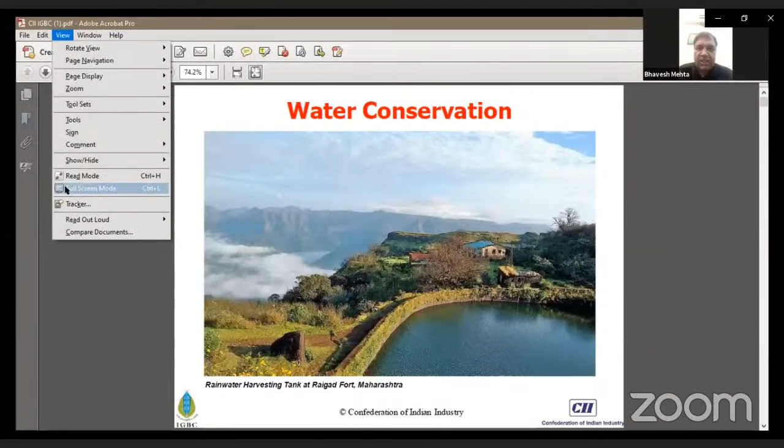Let me say the topic of today is environment protection and environment conservation. First, let me talk about Indian Green Building Congress and CII. CII IGBC is a non-profit organization where we promote the concept of green and sustainability, and we all work voluntarily. I am part of the core committee of the CII IGBC Mumbai chapter. We also have a chapter in Vadodara, but we'll talk about that later. The activity of CII IGBC is to certify buildings as green and sustainable.

The ultimate idea is to provide healthy living to the end users. I use the word 'end user' because a lot of developers nowadays have started constructing green buildings under certification from CII IGBC. The different types of certification are normal certification, silver rating, gold rating, platinum rating, and now we are coming up with the net zero building. The concept of net zero building has also come up, and our own CII IGBC headquarters at Hyderabad is the first net zero building, where on the contrary, it gives energy back to the grid. It produces energy using solar panels and gives the energy back to the government of Andhra Pradesh or Telangana.

I am given 25 minutes, and I am sure I'll be able to finish my session in the given time. So I will start my presentation.

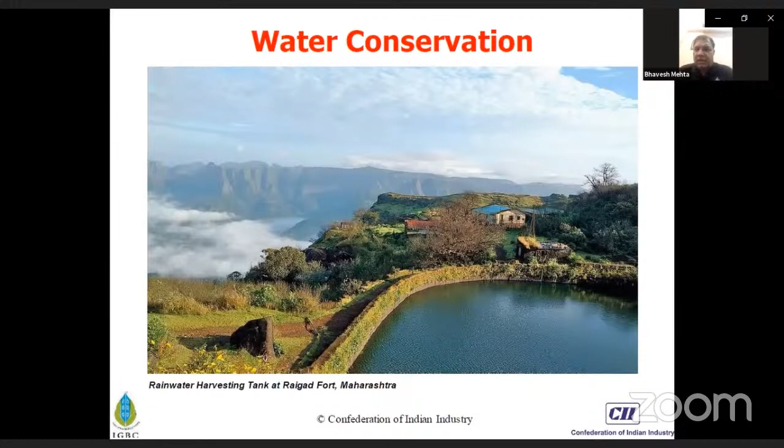Samir bhai has given a fantastic presentation on membrane technology - primary, secondary, tertiary. It is the latest technology, tertiary membrane, which is implemented by many corporates, and nowadays it is a must. Can you shift to the next slide?

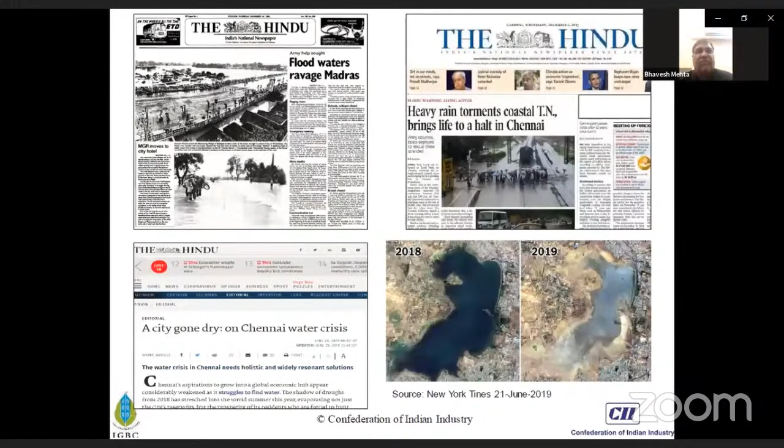If you read in the newspapers, like what Madam says, Baroda some years back was a flooded city, submerged in water. This is the situation that will happen if we don't understand and take care of situations which are not under our control. Heavy rains have torn through coastal Tamil Nadu and other places. These are the calamities we have to address.

So I'm going to talk about the world's water. 70% of the earth is covered with water, as you all are aware.

Now, where is the fresh water? Of the world's water, 97.5% is salty ocean water, which you cannot drink. The fresh water is only 2.5%. If you look at the statistics of the entire water system across the globe, 69% of the world's fresh water is glaciers, leaving only surface water. Only 0.4% can be potable water, or usable, because some of the water, like glaciers, cannot be used. Glaciers are already melting because the earth's temperature is rising. So today we have only 0.4% of the total earth's water which is usable.

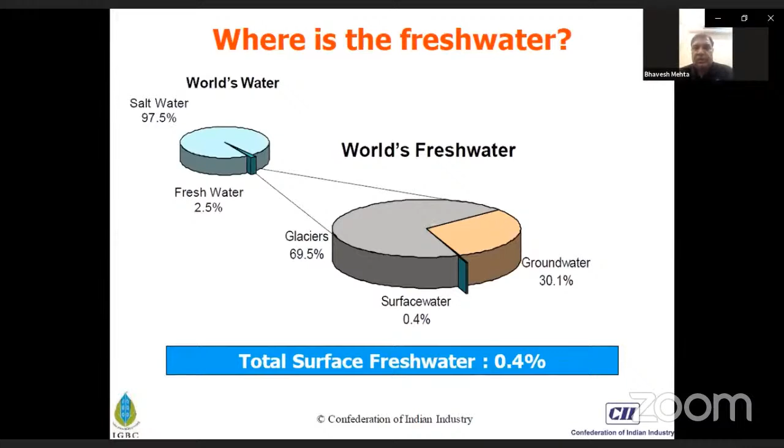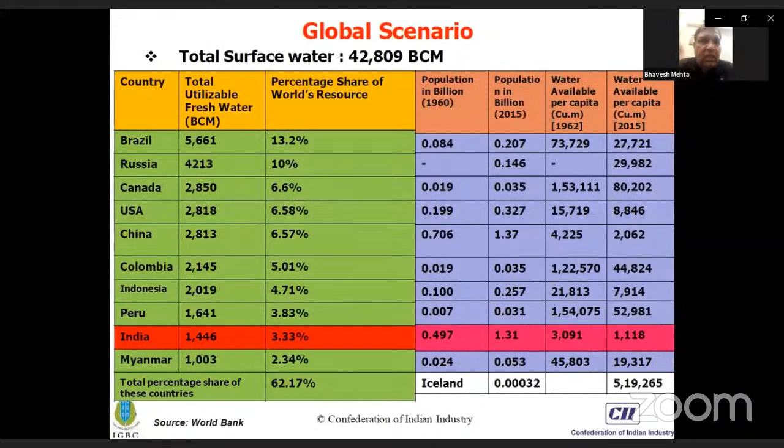So what is the national statistic about water, since we are in India? 17.5% of the world's population is in India, with only 3.3% of water resources. We have 12 major rivers in India, 4,000 BCM of water available, and 1123 BCM utilization.

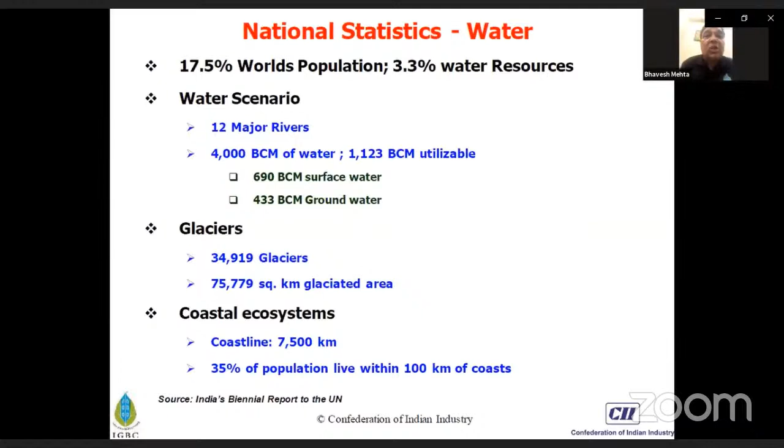We also have glaciers, with the number of glaciers and glaciated area given here. India is lucky enough to have coastal surface and coastal ecosystems, with many states connected to the coastal area. 35% of the population lives within 100 kilometers of the coast.

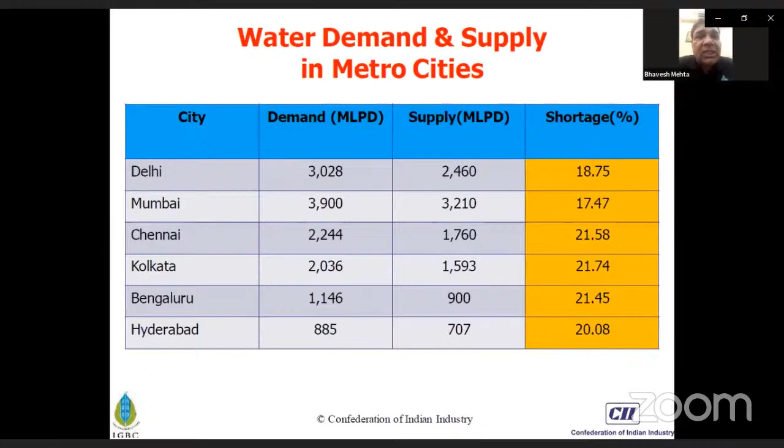So you see the shortage of water. Maximum shortage is found in Calcutta, minimum shortage in Mumbai. This statistic is from the Meteorological Department, and CII and IGBC made this calculation earlier.

Now we'll talk about water demand and supply again. Overall demand is expected to exceed supply because population is rising in India. Many rivers are being converted into dams and barrages, like in Ahmedabad where the Sabarmati River has a riverfront, which reduces the width of the river and restricts it. There are many places where rivers are a major concern, like the Mithi River in Mumbai.

Many of you must have visited Mumbai regularly. The Mithi River is one of the most polluted rivers, because of the lots of activities happening at the banks of the river in Kurla, Bandra, and other parts of the river. So the water demand and supply is already mentioned here. Can you go to the next slide?

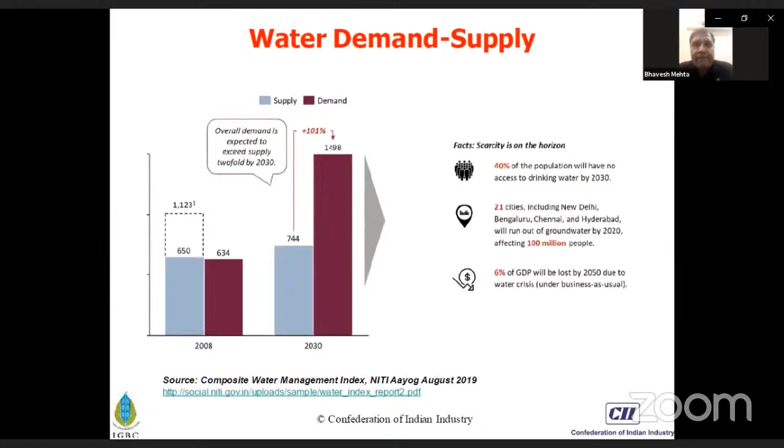You must be aware about the National Building Code. Now I'm coming to something a little technical. As per the National Building Code 2016 (NBC), the requirement of water is already mentioned in the building code, and every developer, every builder has to make a makeup water tank or a service tank in line with the quantity of water required per person.

And if you are a complex, you definitely require water for horticulture, gardening, and air conditioning. If you have a water-cooled air conditioning system, you require makeup water for the cooling tower. There are certain norms given by the Ministry of Environment and Forest, under which NBC 2016 is mandatory and has to be followed by every builder or developer beyond a certain carpet area or plot area, as part of the National Building Code.

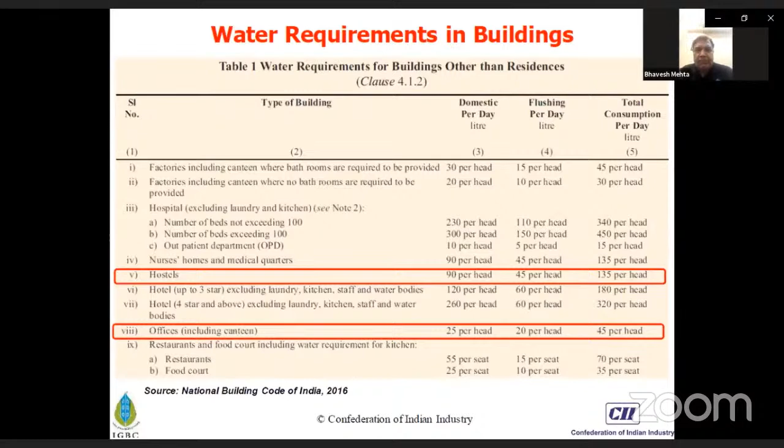Now we should have a 3R approach. One is recharge - there is rainwater harvesting, a good initiative by the Collector of Vadodara, and she said it's phenomenal work that has been done by her.

You reduce the water. Nowadays the water consumed in a washroom, in toilets, in the kitchen - these are the three main areas where we consume water. Now it is mandatory.

Now there are aerators. I have a demo of an aerator, but for some reason I could not play the video. Ultimately, as per the norms, as per the ministry, as per the NBC, low water fixtures are also available now. Even when you apply for green building certification, you should have low water fixtures.

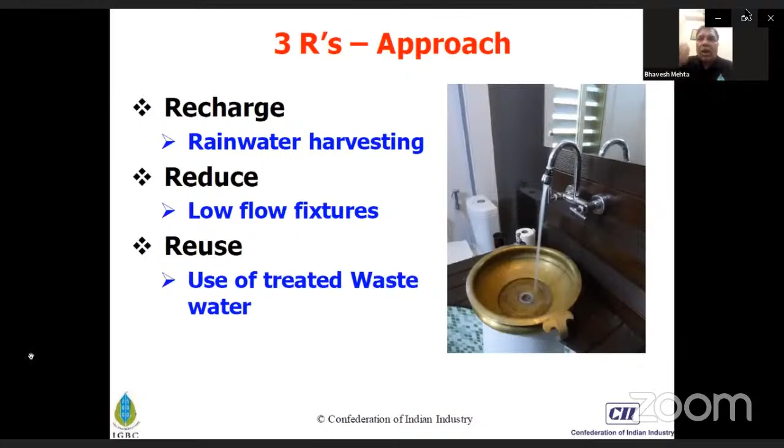But the ultimate idea is 3R. Everyone has to implement the concept of recharging.

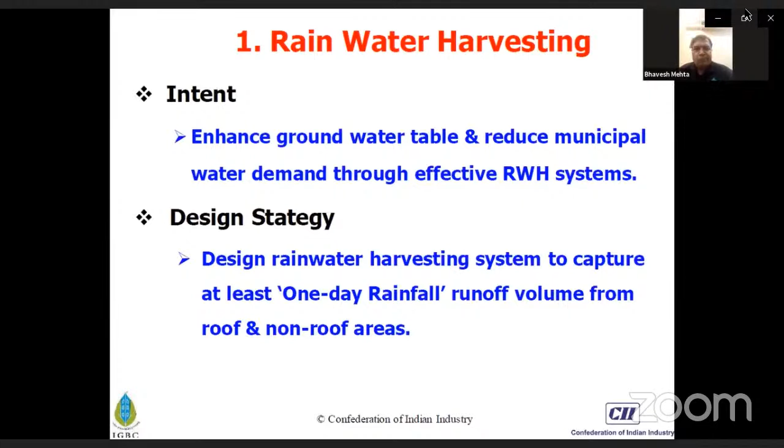Can you go to the next slide? Yeah, so what is the criteria to arrive at one-day rainfall as per IGBC? IGBC is Indian Green Building Council, an autonomous body of Government of India which is directly connected to PMO. So when we talk about average rainfall, every place in Gujarat, every place in India has different rainfall. There are different rainfall amounts in different cities of the country.

So you have to see what is the rainfall of your city, your area. Accordingly, you have to work out the average peak monthly rainfall, and then decide the total to design the rainwater harvesting system. The higher the rainfall, the more your one-day rainfall calculation will come out overall. So higher the rainfall, lower the harvesting volume needed, because when rainfall is more, we need to harvest less. When rainfall is less in the area, you need to have more rainwater harvesting so that you can use that water 12 months in a year.

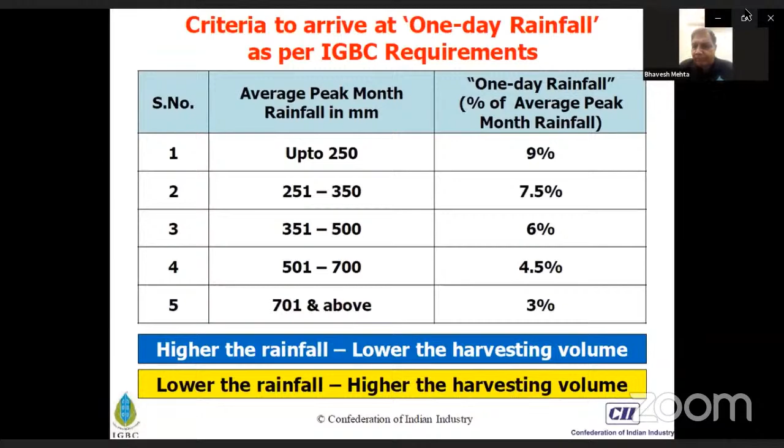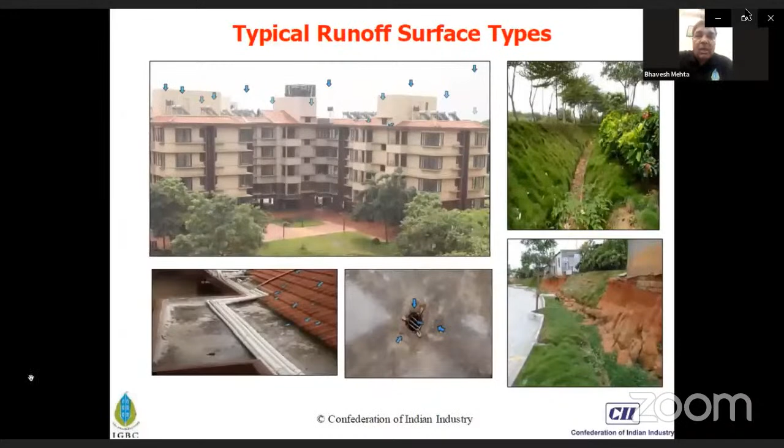Next slide. Yeah, so now you're going to see the typical runoff surface. Runoff surface means when rainwater falls on the terrace, on a chajja, or into a drain. These are the typical runoff surfaces - places where rainwater falls and ultimately it carries over to the last location. Like if water falls on the terrace, it slowly flows down into the gutter and may go to some drain, some nala, and ultimately often ends up in the river. In a case like Mumbai, the water goes into the sea. Whatever rainfall happens in Mumbai, a major amount of that water goes to the Arabian Sea, right beside it. So this is what it is.

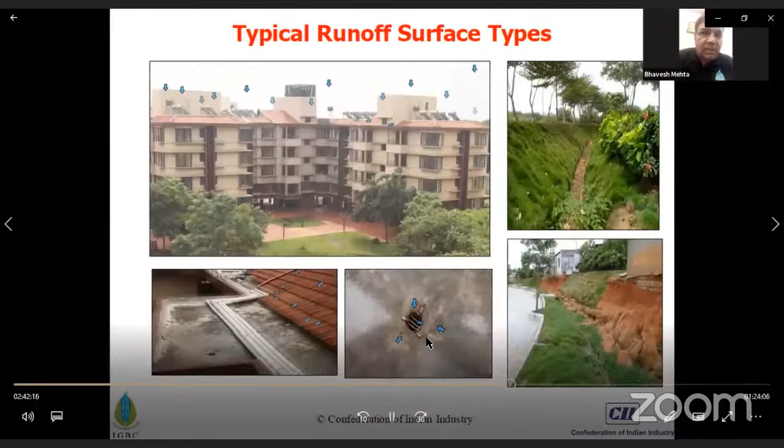This is a clear calculation which we as Indian Green Building Council always promote, because this is also part of the credits. When you do rainwater harvesting with certain calculations validated by IGBC officials, you get certain credits. Whether your building is applying for platinum rating, silver rating, or gold rating, there are certain credits needed. This is one of the credits you can earn through activities in your premises with proper calculation.

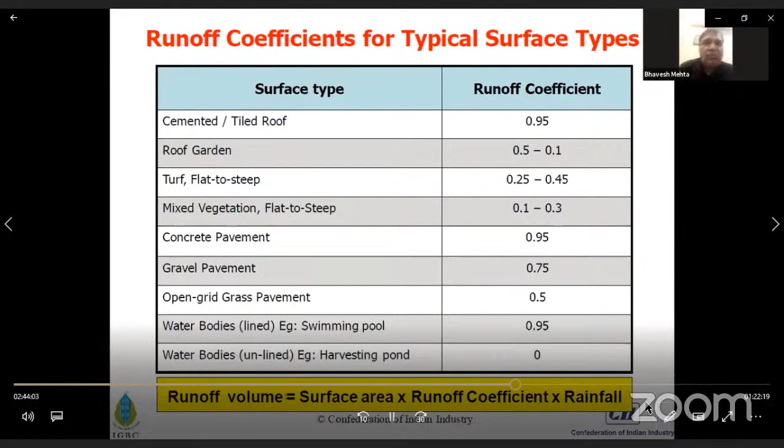Next. So what is next? Yeah, so what are the rainwater harvesting strategies? You have to collect the rainwater. There will be a collection pond around the house, as we just talked about, it will collect into a certain pond, or you have a storage tank.

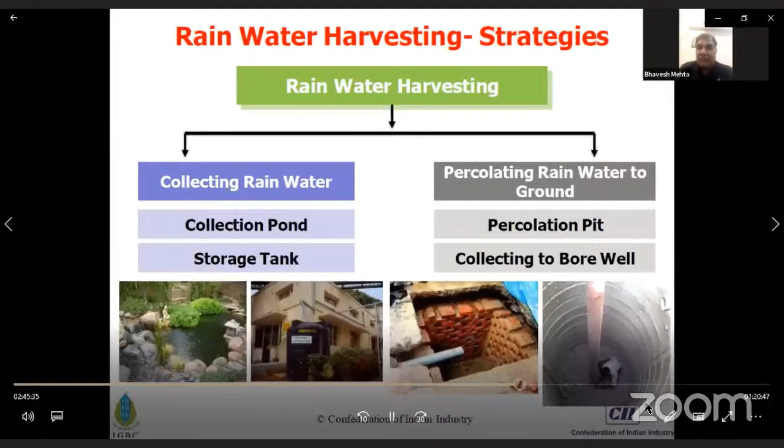What they are doing is, even on the street road and colony road, they have created a canal connected with the drain. So in the entire ONGC premises in Dehradun, whatever rainwater is there gets collected via this canal to one of the rainwater harvesting pits. This big pit is there in that particular ONGC complex in Dehradun. So this is also one of the ways.

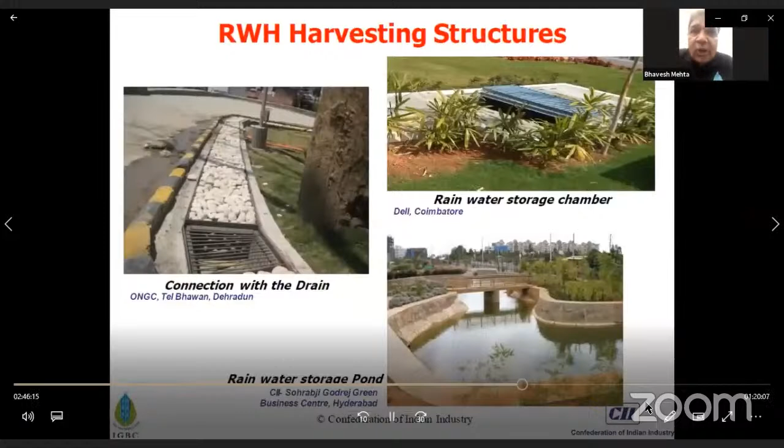In Dell Coimbatore, they have a storage chamber. So this is the way they have done it there.

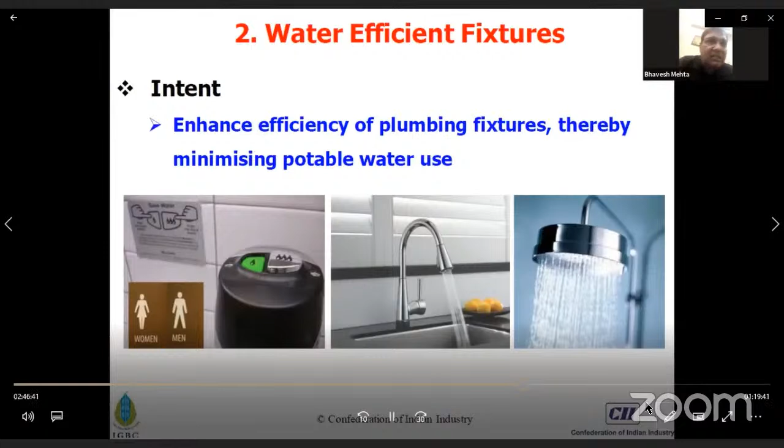Now, if you see the next slide, we enhance the efficiency of plumbing fixtures. You can control the amount of water by providing an aerator to your shower, your tap, and even in a washroom, as I said earlier, you have dual fixtures or 2-level fixtures. Next slide.

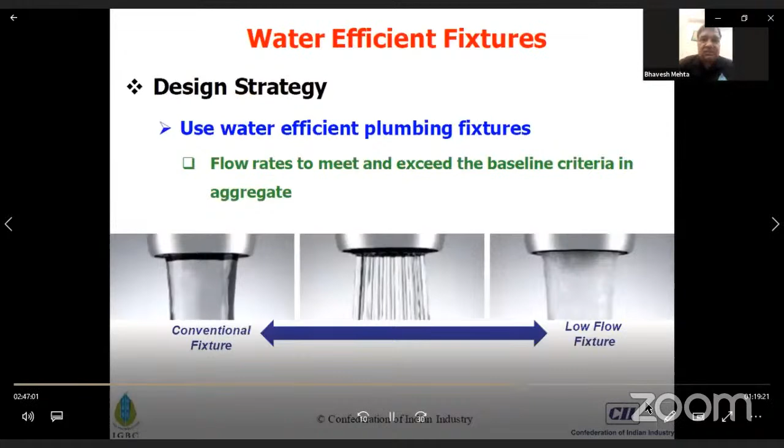Okay, next. So what are the water efficient fixtures? This was the baseline as per the National Building Code.

How much water is used in a single flush versus a dual flush - they have given all this data in the National Building Code and in the Uniform Plumbing Code UPC 2008.

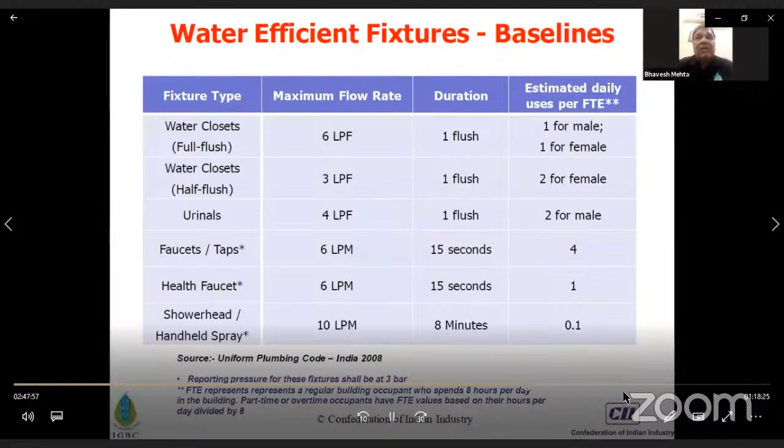So these are the norms given by the Government of India, which every developer, every builder, and every owner has to follow strictly. Next.

So, water efficient fixtures - as I talked about, low aerators, and then dual flush systems, like in a toilet.

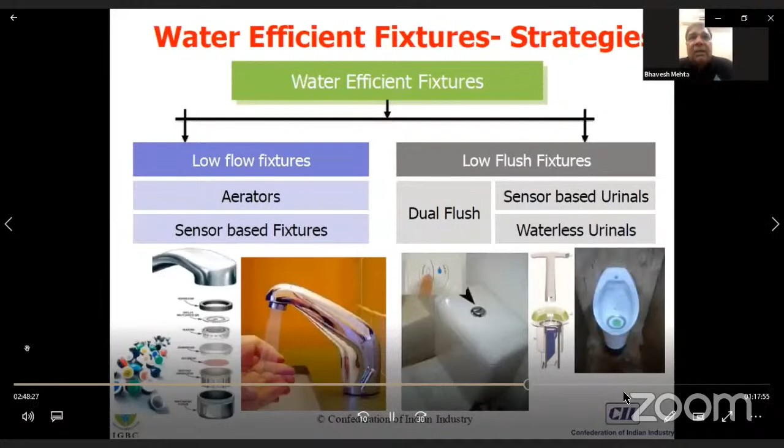Here there is an aerator demo, but it cannot be shown because the video is not connected. Okay, go to next slide.

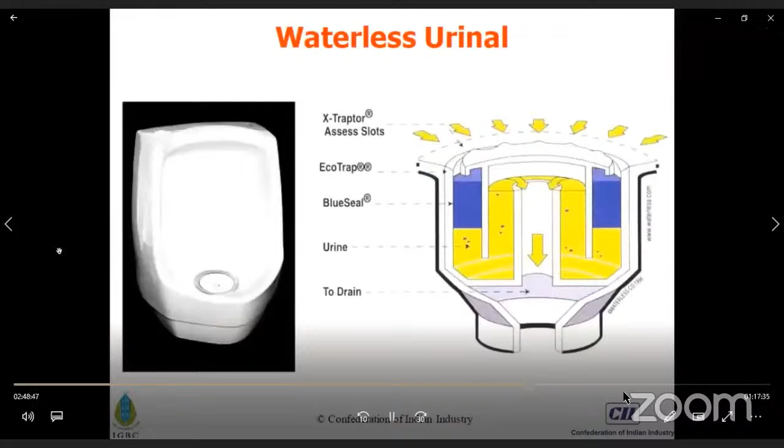So in a lot of cinemas, malls and other places, you must have seen waterless urinals. This technology has come up - already popular in developed countries, but in a developing country like India, it has also been implemented in a lot of places. This is also one way to conserve water and reduce its use, where you don't need any water for the urinals.

If you see the cross section of these waterless urinals, it shows how the system works and how it will not create any odor, which is always a concern with urinals. Using this eco trap concept, it's a standard urinal made by a lot of reputed companies, already implemented in many societies, cinemas, and malls. Next.

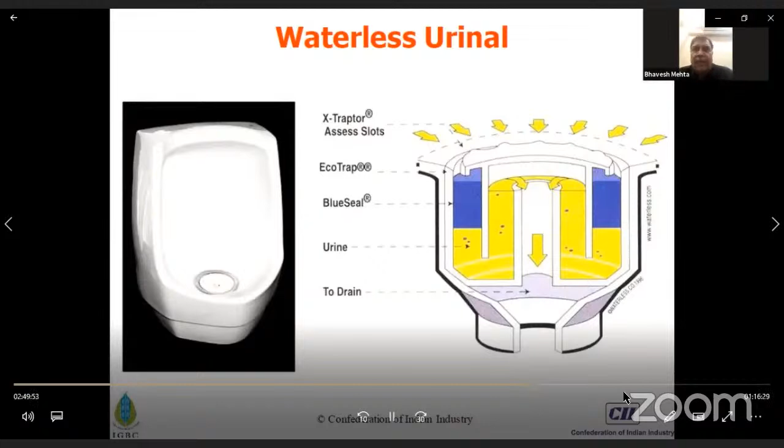Yeah, this is also the same waterless urinals. This is the internal technology, internal arrangement of the waterless urinals, ultimately to avoid the odor.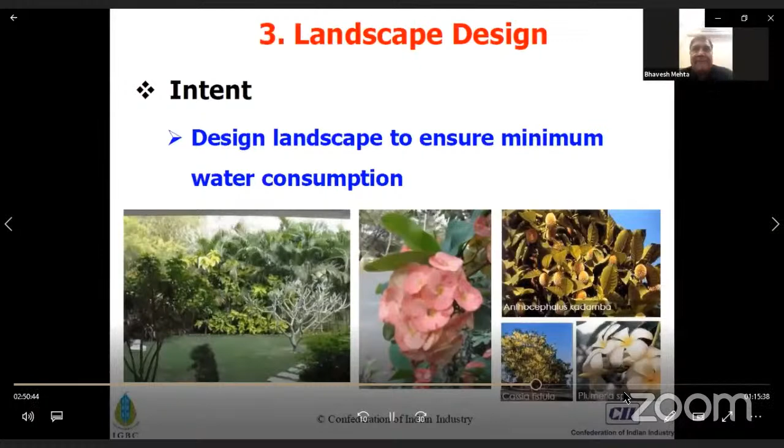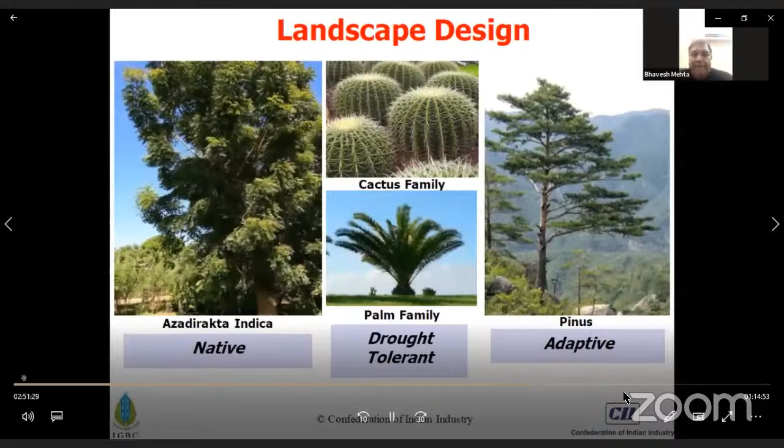How do you manage the irrigation system? Again, this is about water conservation. Suppose you have a big garden or lawn - how do you conserve water? We are all aware of irrigation systems that reduce water demand through water efficient management systems, like central control.

You can provide soil moisture sensors. Nowadays we can measure how much moisture is available in the soil, and based on that, determine the amount of water to pour, along with time-based control. Soil moisture sensors and time-based controls are provided at many places because we should optimize water usage and not waste it.

Segregate the landscape area based on water needs - very important, since some plants need more water and some need less. We should not mix such types of landscaping; instead, segregate both types of plants based on their water requirements. Drip irrigation is very popular, and there are many other innovative irrigation methods being implemented besides these.

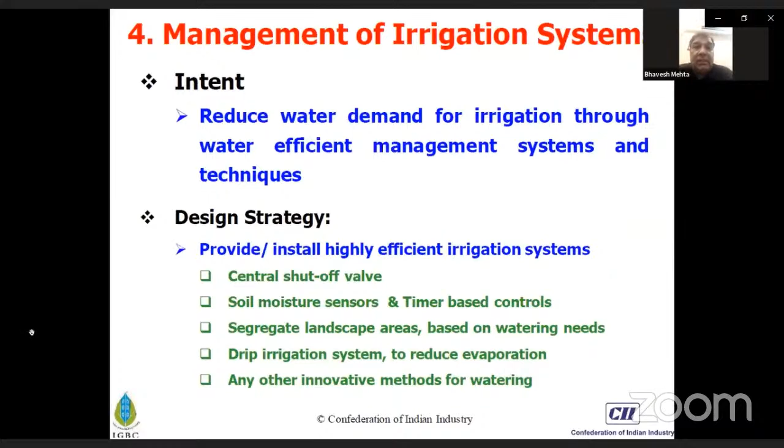This is the water efficient irrigation system - sprinkler systems in the garden, which you must have seen. There are mechanical sprinklers, automatic spray systems, and drip irrigation is also very popular nowadays. Soaker hoses and micro misting - micro misting is very important and effective, optimizing water use. Soaker hoses are shown in the right picture, along with micro misting.

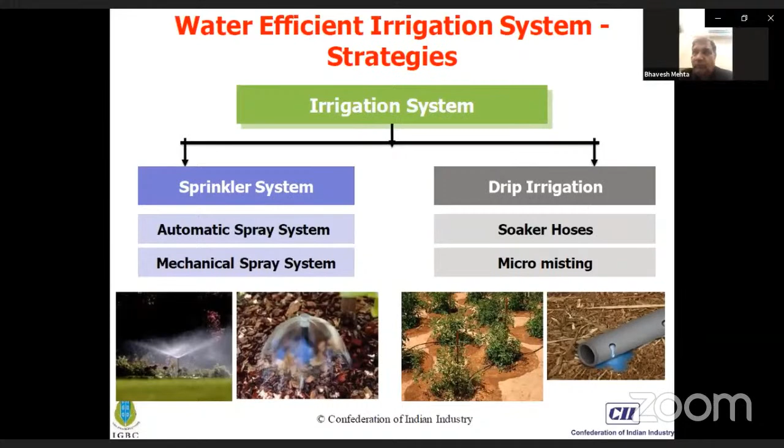Wastewater treatment and reuse - I believe Tuli Saab has given a very detailed presentation on this, so I will brief you. You have to treat wastewater generated on site, avoid polluting receiving streams through safe disposal, and use treated wastewater to reduce dependence on potable water. Recycling and reusing water is the ultimate aim of optimizing water consumption.

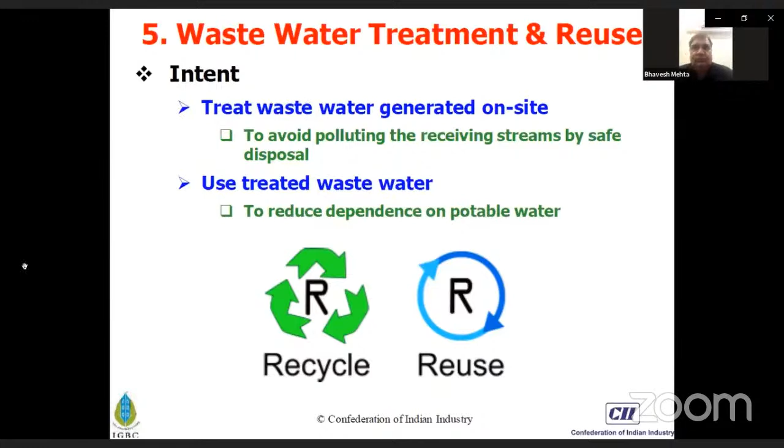There are different methods for wastewater treatment and use. One is compliance option - installing an on-site treatment plant system to handle 100% of wastewater generated in a building, with quality standards complying with CPCB. CPCB or state pollution control boards are very important; we must strictly follow the quality standards given by CPCB, and the National Green Tribunal also partially plays a role in this compliance.

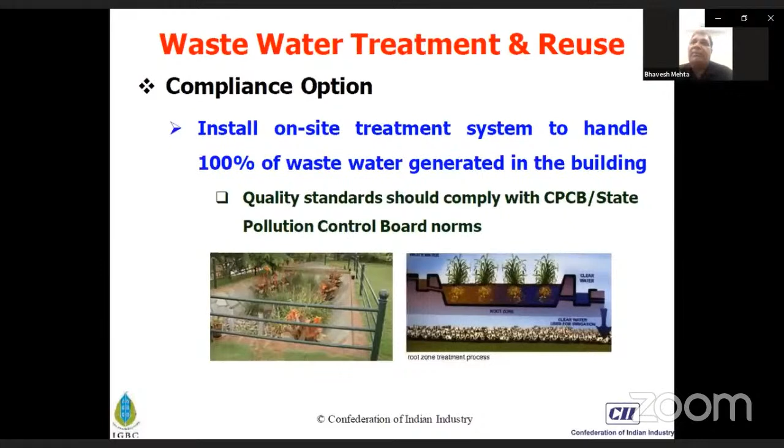What are the strategies of wastewater treatment? There's biological treatment, like the Phytoremediation system, which is one of the best systems I have seen in Hyderabad, and root zone treatment, as shown in the picture. Then there's mechanical treatment - every factory or manufacturing unit has mechanical treatment through primary, secondary, and tertiary treatment stages. So these are the two main ways of wastewater treatment.

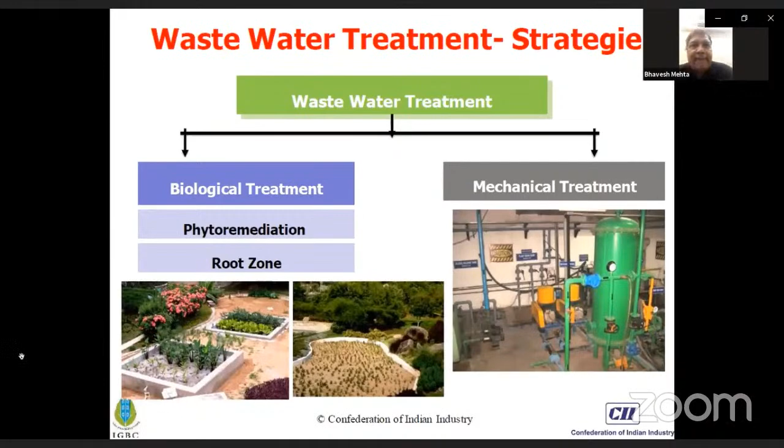Phytoremediation is a very nice technology, but it requires a good amount of space. The investment is very low, and there is no operating cost. You just have to have a slope.

The water going to the discharge side requires a certain slope and a trench to be made.

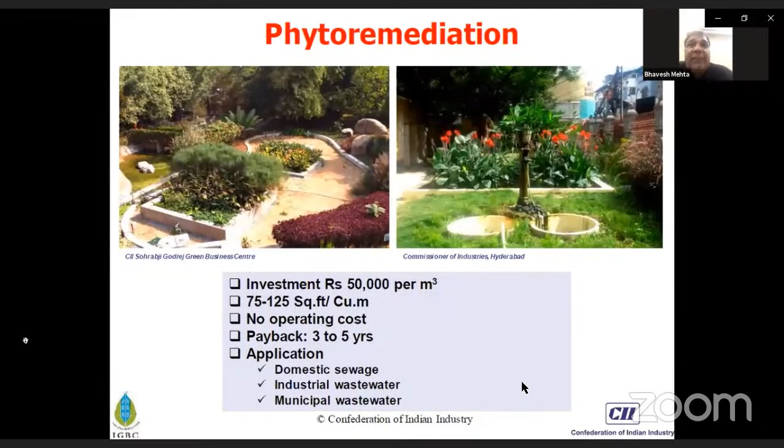So this is the phytoremediation system in detail. See the cross section of that.

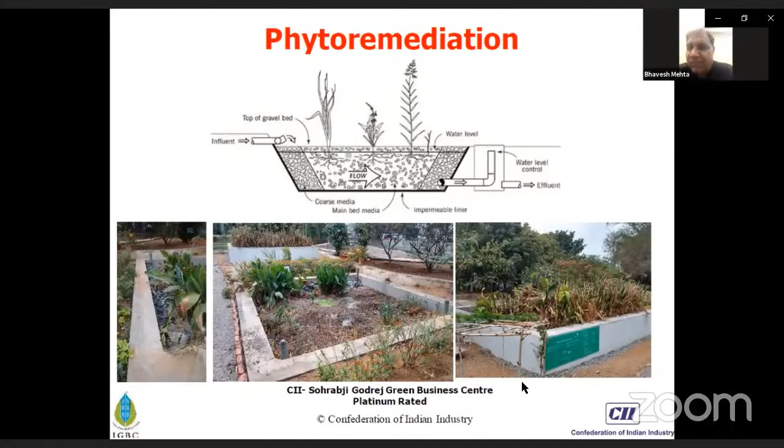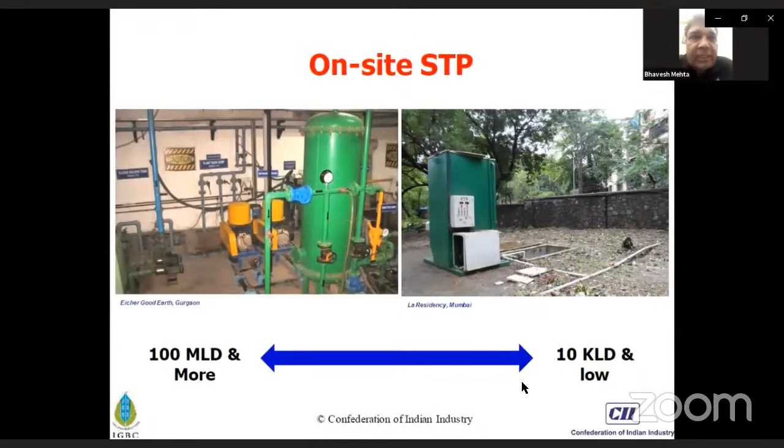So these are the on-site STPs which I have seen, and Tuli Saab is the master in this type of application. Can we go to the next slide?

Use treated wastewater for landscaping, flushing, and cooling tower. Water-cooled air conditioning systems require a huge amount of water for makeup of the cooling tower.

As per the Ministry of Environment and Forest, when you go for the MOEF approval of your building or premises, they say the treated wastewater should be utilized first for flushing, second for horticulture, and then only you can use it for the air conditioning system.

In Reliance, almost all our plants are water-cooled because it is most energy efficient. At Reliance Corporate Park in Navi Mumbai where I sit, we have a 30,000 ton water-cooled air conditioning plant. With 25,000 employees sitting in our premises, whatever water we consume, we recycle.

We have zero discharge, and we are proud that we are not throwing any water into the nalas.

Whatever impurities, whatever scrap, whatever things come out as yield from that, we recycle it and make fertilizer.

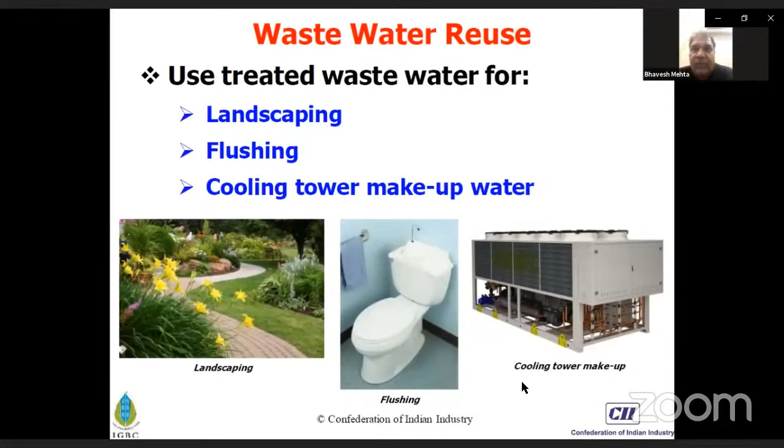This is very important. Of course, in India we don't have water metering, but nowadays many areas are thinking about metering water. We get water for free, so we use it as and when required, in whatever amount we need. Often taps are left open, pipes leak, but we don't bother about that. But now even in Mumbai, one developer has started saying that however much water we give you, we will meter the water.

When you meter the water, you will definitely start thinking that if I use more water, my bill will come higher. Like electricity, where we have meters at home, we optimize our light usage carefully. But when water metering also starts, I don't know how far the days are, but I am sure that automatically water usage will reduce to 70%.

So we have to encourage sub metering to improve the water performance of the building and save potable water. This is the idea behind this.

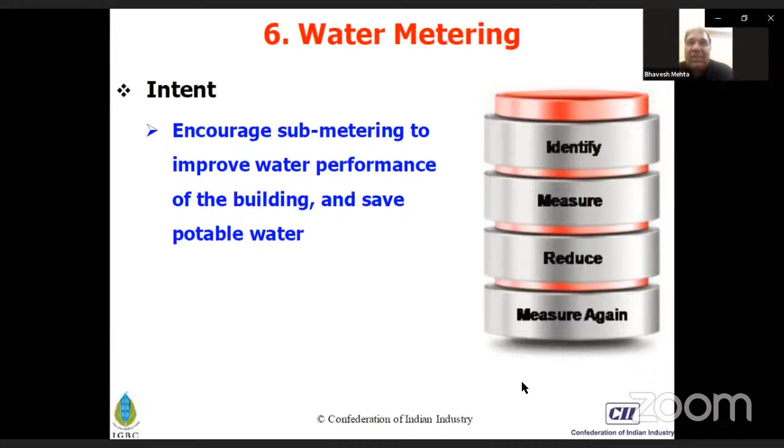Building level metering, further to the municipal water supply, borewell water consumption, treated water. Nowadays even many societies, BMCs or local government authorities, have started water metering. We have to pay water charges also, but it is very minimal. Even BMC, Mumbai municipal, or Vadodara Municipal Corporation charge water charges, but it is very minimal. I don't know if they charge high rates just to collect money through metering. I don't know how metering is done in Vadodara, but in Mumbai we have to pay water charges. So any source of water consumption - BMC, municipal supply, borewell water, treated water - this is what it is.

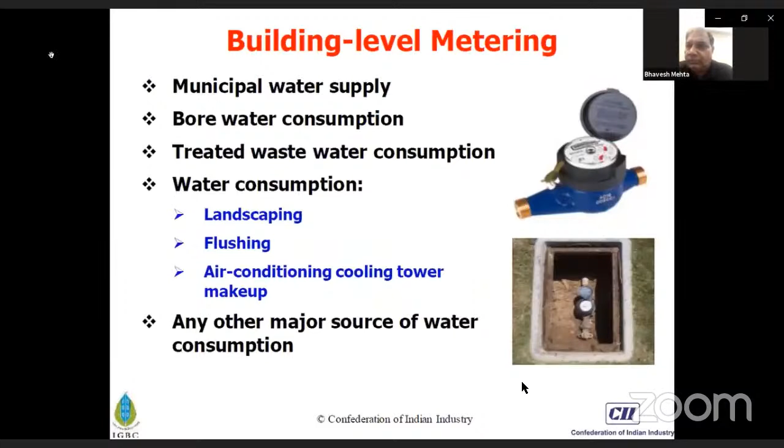Yeah, next slide. I think I have covered this. Thank you very much for listening to me, and I'm really proud.

Thanks to Deepak, my friend. Actually, we are school friends. So thanks to Deepak for this invite under the august dais, and of course Collector Saab Madam has given a fantastic presentation.

I would like to share that CII IGBC has a chapter in Vadodara, and a lot of green buildings are there, and we can organize a session. Today was about environment, and I was thinking, let me pick the subject of water and water conservation. So we also have a session on green building, green and sustainable building, healthy living - the concept is healthy living. So we are open to any type of support to anybody who requires it.

IGBC has an AP, accredited professional program. Anybody can apply for that exam. Any architect, especially architects and engineers, are very much appreciated, and they can undergo this IGBC AP exam and become an accredited professional from IGBC. So this is what I would like to share with you, and thank you once again.

Any questions for this? Mr. Bhavesh Mehta, Bhavesh bhai, very many thanks. Sir, just a light question - how much time should we require to understand your presentation in depth, because the way you have presented, one slide is one subject, and the excellent in-depth knowledge, whatever I heard from Deepak bhai about you, hats off to you. Thank you, excellent presentation sir. Thanks that we got the opportunity to organize live streaming on YouTube.